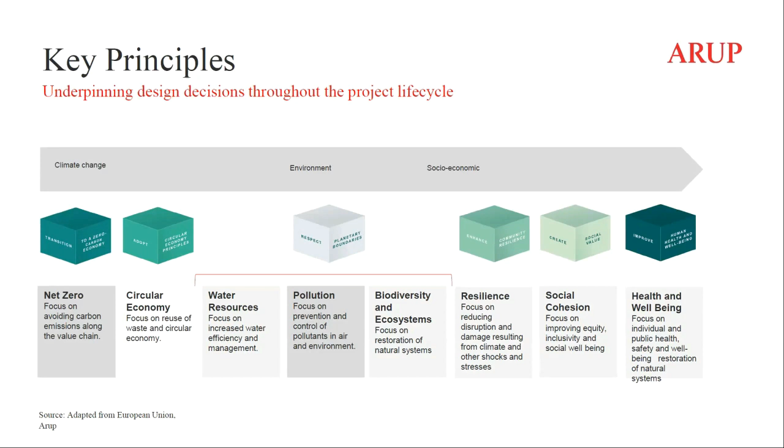It is relevant to talk about materials and material flows and the impact they have in the construction industry, within which cities sit, because it accounts for around 23% of the total CO2 equivalent emissions impact. And it has grown over time, it hasn't decreased, so it's not an easy task.

What I'd like to emphasize is that this sits within the fact that we are in a finite environment. 20 or 30 years ago, finance and the world of speculation, derivatives, securitization, was a growth element that created certain values but also problems, and it didn't take into account that we're in a material world, a finite biosphere with finite chemistry and materials and links you can't speculate with. You can't triplicate things out of a stock exchange market and expect the world will keep absorbing that.

That logic has permeated, and I gather from the audience that the professions of engineering, science, material science, architecture, chemistry, biology, all related to the actual material world, are more relevant than ever. That's a very important message I want to pass to you designers, because we need to curb this and a few other things you'll see during the presentation.

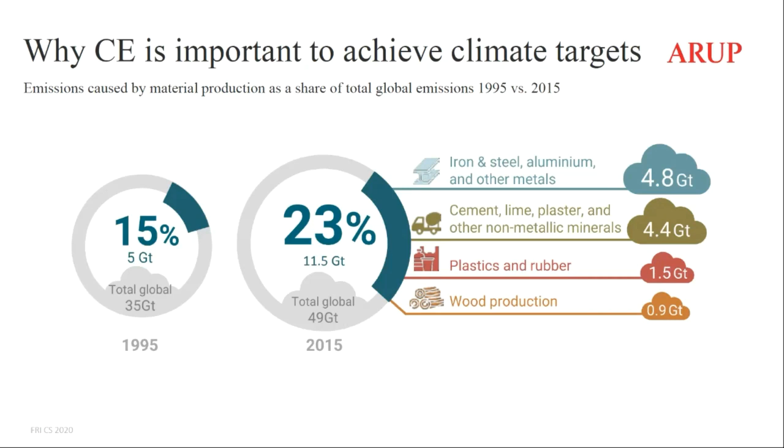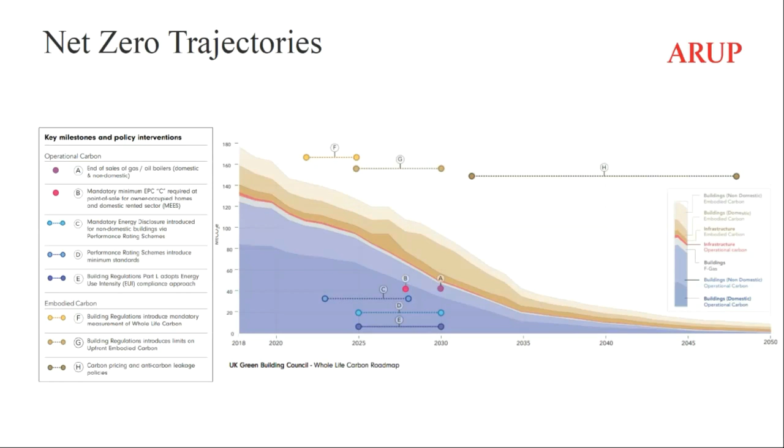I wanted to emphasize, connected to the previous slide, that Europe in particular, and even more so Nordic countries, but Europe in general, including Italy and particularly Northern Italy, has done a really good job moving quickly in the last 20 years towards energy efficiency.

So the demand for energy for operational uses that we have in buildings is decreasing, and that has been a success. Now the problem is embodied carbon. The big picture is that we've done our job, give or take, so we need to keep making it more efficient, but we've done our job on operational energy. We need to now move into embodied carbon and embodied impact of materials and material flows, etc. That's one of the big messages I wanted to pass to you.

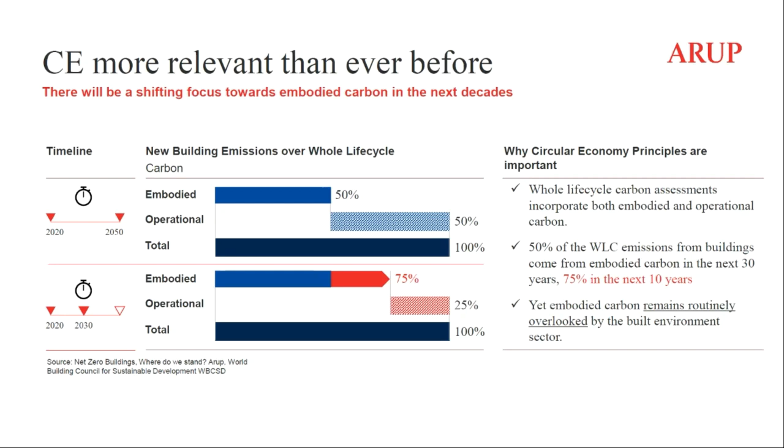And then let's go into the trends that I think are relevant. Market demand is growing, but I think mainly because of this self-awareness and the pressure coming from public opinion and the new generations changing, i.e. Greta, but she's just a representation of a much wider trend. I have kids of the same age and they're all pushing in that direction, and you're probably totally aware of that.

But also the regulatory context, particularly in Europe, the Green Deal, the EU taxonomy is going in a steady manner, moving in the right direction and pushing for things that are now going to become requirements. And that is good, that is only good.

So we have standards that require looking at life cycle assessment of buildings, EN 15978. We have standards that require thinking about adaptive and flexible buildings, EN 15643, and that is now a standard, so you can pick it up off the shelf and start using it with your clients.

The point is how you are starting to enforce that, and how, for example, the PNRR is going to request this in a more or less strong fashion when projects are funded, infrastructure and building projects are funded through that mechanism.

And we have developed tools to support our clients, to make it very quick, very efficient, very transparent, auditable and accountable. And we're very happy that in the process of doing our own research and development and looking at trends, we've started to pick this up.

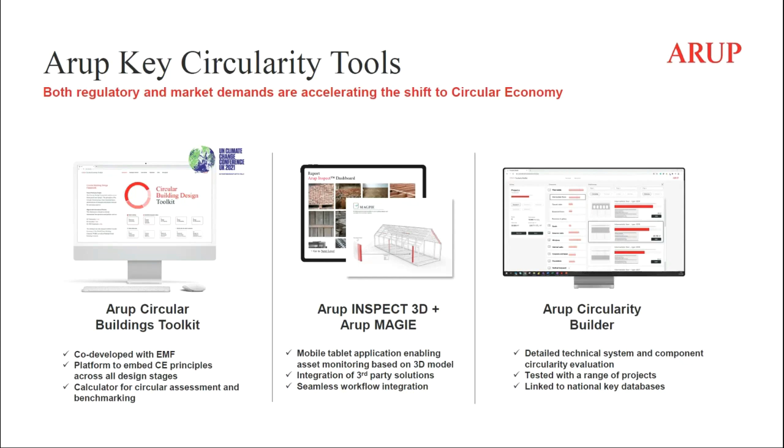That has made us pick up knowledge, give knowledge back, and create a network of knowledge and impact that we think is super relevant, because alone we're not going to do anything, nor is any of those going to be doing anything by themselves. So networking on this has been essential and fundamental to influence, to create the tools we have, and to get into a different level of implementation.

As I only have 15 minutes, I'll go straight to the projects.

Sorry, I wanted to discuss this as well, the issue of life cycle. So the point I was making about the tools you saw before was related to the design stage, planning and design stage. The tools I'm going to show now are related to, let's call it, the approval of the planning process.

So you set up guidelines for third-party partners, say a city development in London, Helsinki, or Milan, where you set out a set of requirements from the horizontal developer to the vertical developer so that they can actually meet certain parameters within your project.

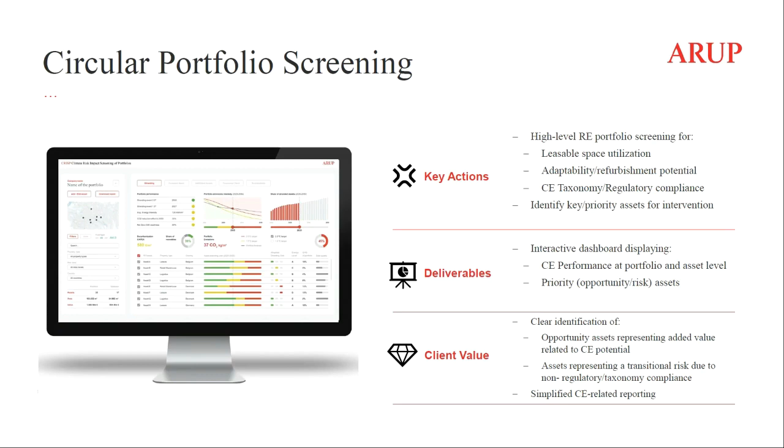And also a portfolio screening tool, so that if you already have 10 buildings, 5 hospitals, 25 hotels, you can start screening your portfolio and see how those buildings, in terms of the future, what they already have as a kind of buried circular economic embodied carbon impact, and how you can start improving on that, and as an investor, either pulling out, retrofitting, or improving those buildings if and when needed.

Examples: the People Pavilion in the Netherlands, done by us for the design week in Eindhoven, where we designed and implemented a building that was demounted completely.

This brings me to a point: after the challenge of measuring embodied carbon, there is the challenge of decommissioning buildings and materials, which is the biggest next step after measurement and designing for reduced impact. Then there's how you decommission those buildings and reuse those materials, and that's what this is trying to demonstrate and push the boundary on.

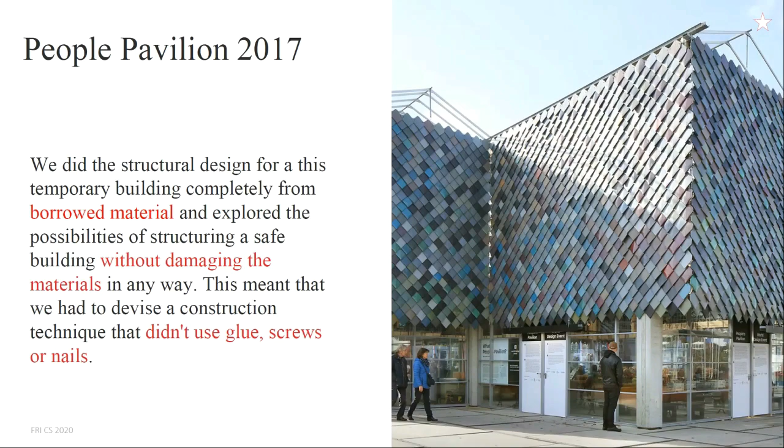This is from 2017, so it's not new, but it's a building completely done with reused materials, no nails, no fixed anchorage elements, so that you could unpick all the materials and reuse them in a different building or infrastructure over the next stage of the project's life.

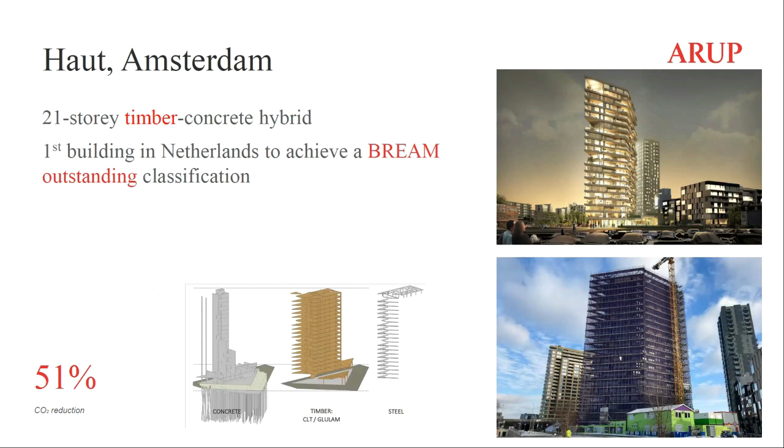This is a project in Amsterdam, the tallest high-rise building with a very important component of CLT. It's now almost completed, but the important point is that the building has, over its life cycle including materials in scope 1, 2, and 3, a 50% reduction of CO2 equivalent emissions because of the inclusion of timber in the mixed structure we developed.

This is a project in Milan - actually an urban regeneration project, not a single building. Here you have the baseline of what the building would have done, meeting the requirements of Italian regulation and the Lombardia regulation. In this case, we are reducing certain elements to reduce the carbon over the life cycle of the project. This isn't rocket science today.

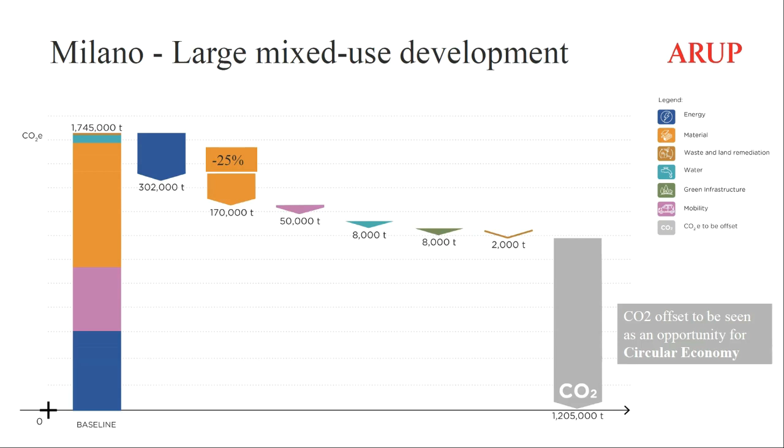What I want to highlight here is the materials element, which is a very relevant part of the process. As you can see, it's almost half of the impact. As I was saying before, energy, operational energy, and plug loads are a component we are more or less getting on with. The material side is the one that needs more focus and attention, and that's the challenge we're facing.

This is in Provincia Autonoma di Trento, in Rovereto - a decision by Trentino Sviluppo to develop a cluster of sustainable companies in Borgo Sacco around the old Manifattura. With Kengo Kuma and Arup, we developed a sustainable master plan where all the structure is in CLT, resulting in a massive reduction in CO2 equivalent embodied energy on the new part of the buildings.

There is a mini hydro that provides the operational energy, which is practically zero emissions. I think this is a very simple, straightforward example of a client making a decision - in this case Trentino Sviluppo - to take a systemic approach in this area of circular economy and embodied impact of materials. And it's not that difficult in Italy today to achieve that.

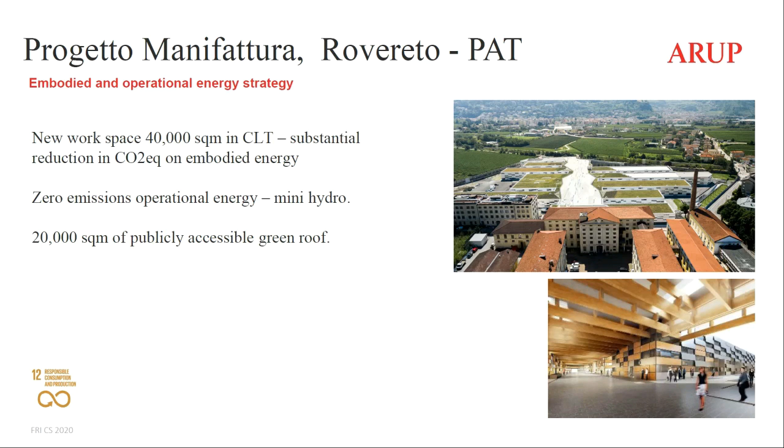This is another project which I think is very relevant - how much time do I have left? I think still 5 minutes. Okay good, because this is an interesting, tricky, and lessons-learned case for us.

We won a competition in Helsinki for the new district in Jätkäsaari, which is the old port of Helsinki, in 2007 or 8. Now this is all built, and we're very proud that it's built.

But the client - Sitra, the Finnish Innovation Agency, plus a large developer and the biggest national-level housing association - requested a project that would transition from high to low carbon impact. They didn't want a full display day one of what can be done, and they requested a life cycle analysis over 50 years for this district.

The main finding here is that the building and its operation is only 10% of the problem. The other 40% is transport and mobility - how you get in and out of the building or district - and 50% is consumption, what we consume within the buildings and districts we use. If I bring water from Australia, to make an extreme example, versus opening the tap water in Helsinki, it makes a big difference. If you take that for all the food, all the certified paper and where it's coming from, that accounts for 50% of the problem.

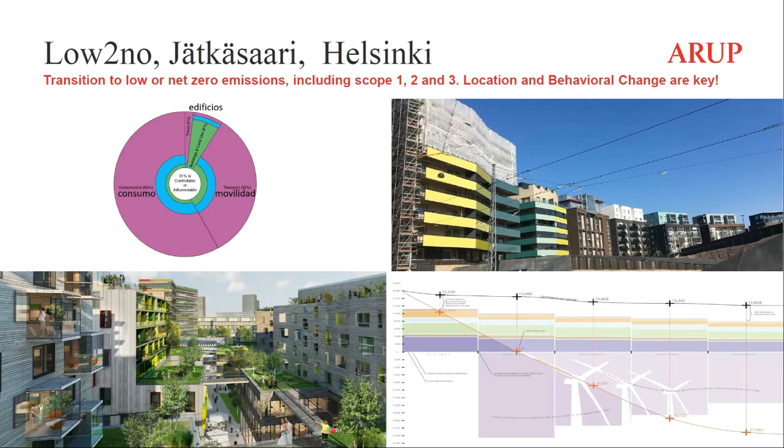And I'll finish with this beautiful example from my half home country—I'm half Italian, half Chilean. It's in Chile after the earthquake in 2010, which was 8.8 on the Richter scale. There was a tsunami, and it wiped out a very important part of the city, Constitución. In the process of reconstruction, we were invited to help with a master plan.

One of the things that came out was that the cellulose producing plant there was throwing excess heat, according to local norms, all compliant, into the sea. We proposed to recover the waste heat from the cellulose pulp making process, and a social infrastructure of swimming pools was created. So a low to middle income city in a middle income country, recovering waste heat from an industrial process, using it for heated pools, piscine riscaldate, that now is a social infrastructure accessible to all the public.

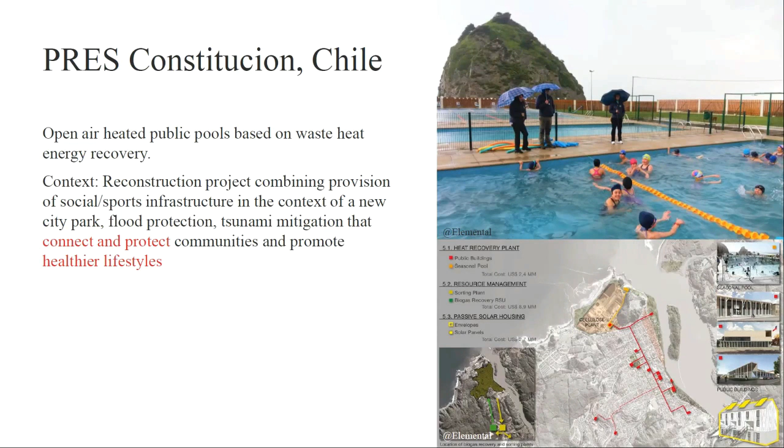So this is not only about penalizing—there are many, many opportunities like this around the world, which are just win-win situations. It's not only about policy and the stick, but also the carrot. I just want to leave it there because I think it's a good example to inspire us all. I had another one, but I think it's a bit too late.

You can present it. Okay, very quickly, last one. I went from a building, and now I'm going to a 25 million people city, Shanghai. This is a very interesting case where we helped the municipality of Shanghai do the urban drainage master plan.

So, acque piovane superficiali, la gestione del surface drainage master plan, where they have a 20 billion euro budget to rebuild this urban drainage system for the city. Shanghai is a bit like La Pianura Padana—very, very low lying, almost no gradient. And in that particular case, there's more of an issue with the tide: when you have rain and high tide, you can't evacuate the water.

So this is a very central element, over and above climate change, which is a big deal—it only adds complexity to this. One of the things they asked us to do was look at how we could include more blue-green infrastructure, so less hard infrastructure, and how we could manage that.

What we did was look at options where, by using machine learning, we examined the quality of the soil in terms of permeability and precise datums, so we could reduce and refine the need for civil works—concrete channels, holding ponds, and so on—and change as much as possible to green infrastructure. That allowed them to save around 15 to 20% of the total budget and reduce the embodied carbon impact of the overall plan by 30%. Again, a saving measure, which is massive.

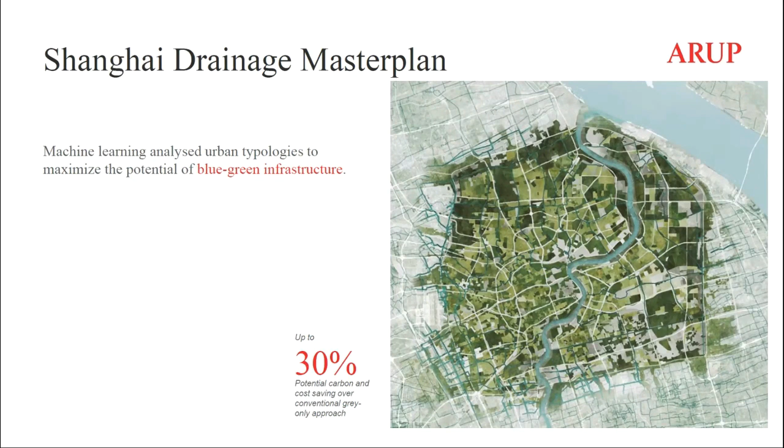So when clients, public or private sector, come to you and say sustainability is really expensive—wait, no. Sustainability is not more expensive, it's more rational, it's more efficient. In this case we're talking about big numbers: 10 to 15% saving on 20 billion euros is what you know—I don't need to explain. Thank you.